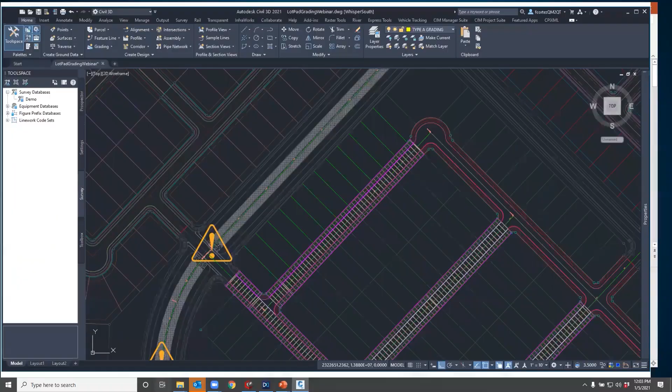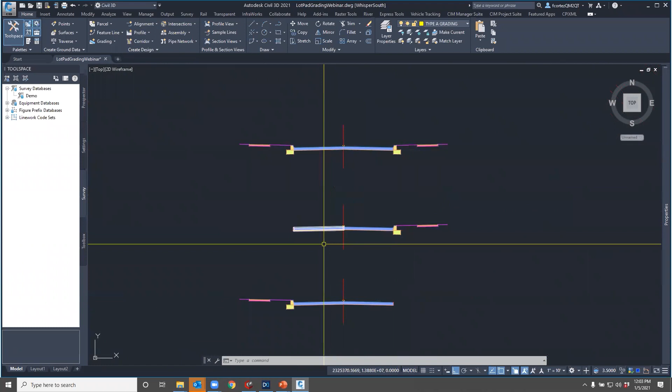So without further ado, let's go ahead and get into our demonstration. This should look pretty familiar to everybody. What I have here is just a basic corridor. This is a residential project. If we come over to the side, we have just a regular full street section, right curb, left curb for our intersections. And this is the area where we're going to be showing you how to use this new tool. What I want to do first of all is explain the different types of lot grading.

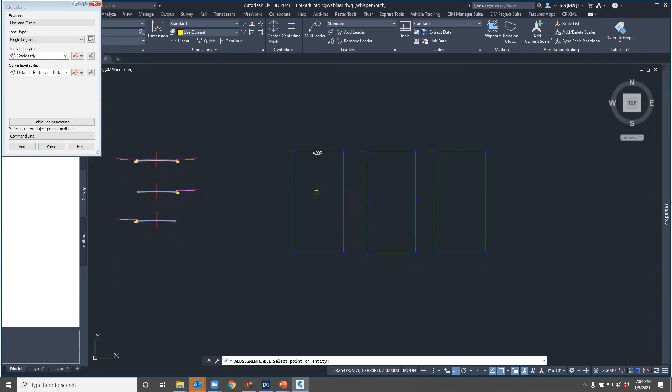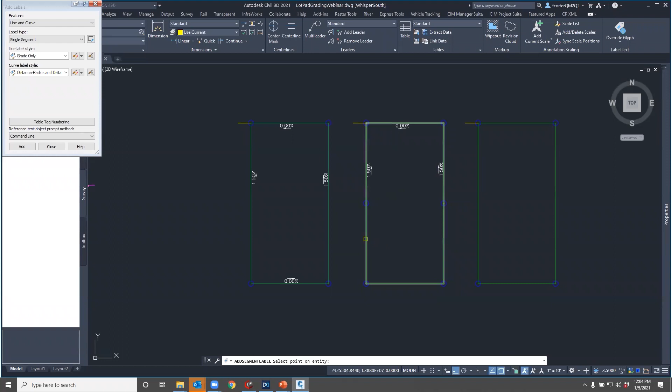I'm here in South Texas, where we have A, B, and C lot type grading. So what an A lot typically is we will have no grade horizontally. Longitudinally, we'll have on an A lot grading towards the front, like towards the street. What we have with our B lots is we'll still be flat across the front, but we'll have a split where the front half of the pad will grade towards the front and the back side of the pad will grade towards the back. Then what we'll typically have is a C-type lot, where as you probably guessed by now, it drains towards the back.

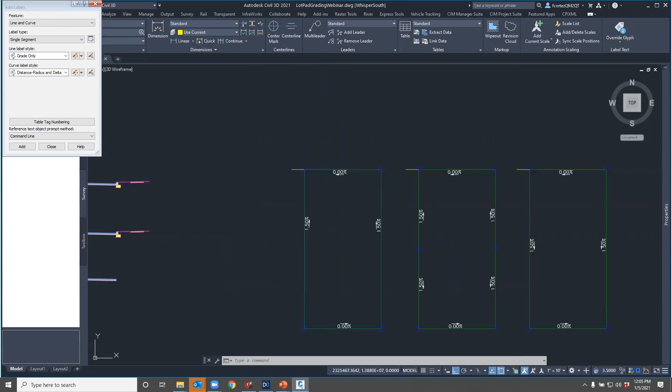So I know these are probably called different things in different parts of the country. Here in Texas, they're just called A, B, and C type lot grading. Now, what I want you to notice is that this is just a regular feature line right now. There's no grade, no elevations on it. I started off at 0, just went up at 1.5%. Started off at 0 here.

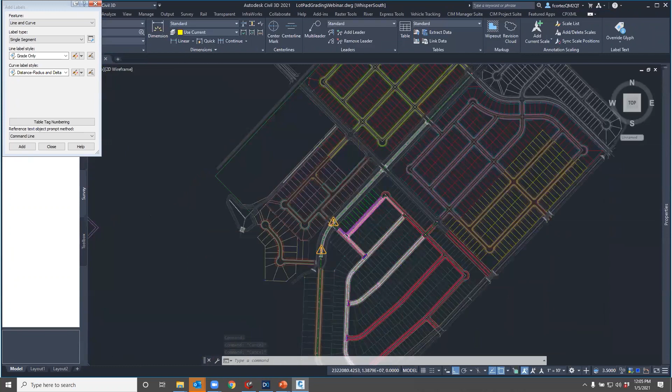So what we're going to end up doing, first, what we're going to show you is how to grade along these lot lines using our AutoGrader tool. Then on this side, what I'm going to show you is how we could do, let's say, a C lot here where we want to drain towards this drainage structure. And on this side, we probably want A lots because these two streets are pretty much the same elevation.

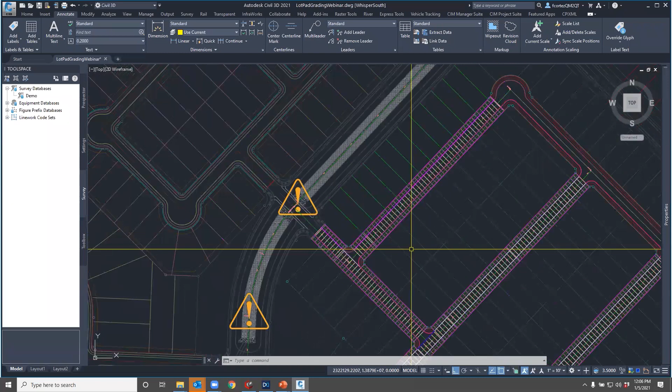So what I'm going to do is I'm going to go ahead and start by opening up my CIM Project Suite. I'm going to go ahead and open up the AutoGrader tool.

If you have this suite already, right off the bat you'll notice there's actually a couple of new buttons here. These should be rolling out with the new version, but now we have the ability to go ahead and create surfaces straight from this interface, and we can also create surface boundaries straight from our interface.

What I want to go ahead and show you is we're starting off with a blank canvas here, so nothing's been set up. So we're going to go ahead and walk through the different types of grading AutoGrader could do.

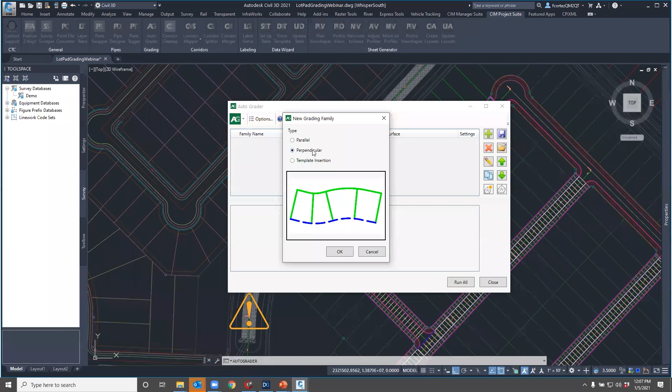Right now we're doing residential lot grading, so the parallel feature wouldn't be something we necessarily use a whole lot. The two we're going to be mainly focusing on are perpendicular grading, which is currently available if you have a CIM Project Suite, and the new feature called template insertion, which works a lot along the same lines as a perpendicular setup. But the difference is, as you can see in the preview, we can go ahead and add different items along our road alignment and throw it in perpendicular or horizontal.

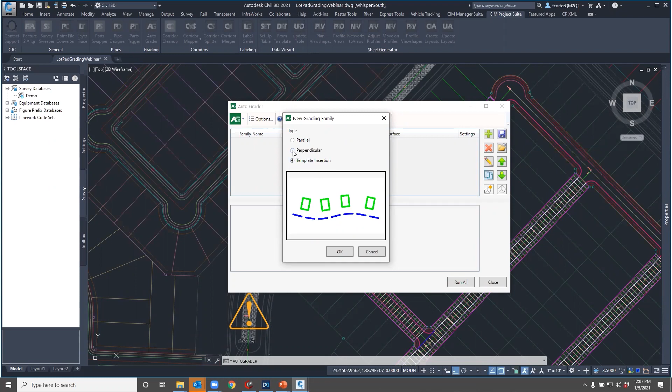So first, let's go ahead and walk through a perpendicular setup.

What I'm going to want to do first is take these existing feature lines I have out here. If I close this out, I have this row of existing feature lines. If I look at the properties and open this up a little bit more, you can see there's an elevation here at the right of way, which is pulled off of my corridor surface. But the back has no elevation, and that's going to be the same across all of these.

The main thing I want to point out right now is that there's only two PIs on this feature line. Typically when doing a C-type lot grading, we would want to go, let's say, the first 25 feet, which is usually like a building setback line, and we might want to add a PI there on all these. Then we might want to go the pad distance, which is usually 60 to 80 feet, and set another PI there. I'm going to go ahead and walk through how we can establish those on these existing feature lines using our AutoGrader tool.

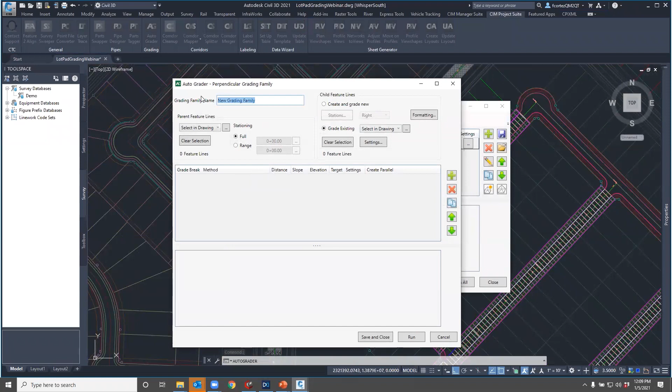Let me go ahead and relaunch the tool. And what we're going to call this is type C grading left.

So there's two ways we can pick feature lines. We can either select them from the drawing, or we can also do them by a filter, by a layer, description, by a name, style, or we can pull them in from sites.

In this case, what I want to do is just select it from the drawing. I'm going to go ahead and grab that feature line.

Now what I can do is there's two ways I can create child feature lines off of our main feature line. I can either create new ones or I can grade existing ones. So in this case, what we want to do is grade the existing ones, since we already have feature lines there.

So in this case, I'm going to do it by filter. I can type the layer name in here, or I can hit the green select box, which I'll do now. Go ahead and hit OK. Now it's only finding one feature line, so let me go ahead and hit the selection box again and grab the other ones. Now you can see it's found 13 feature lines.

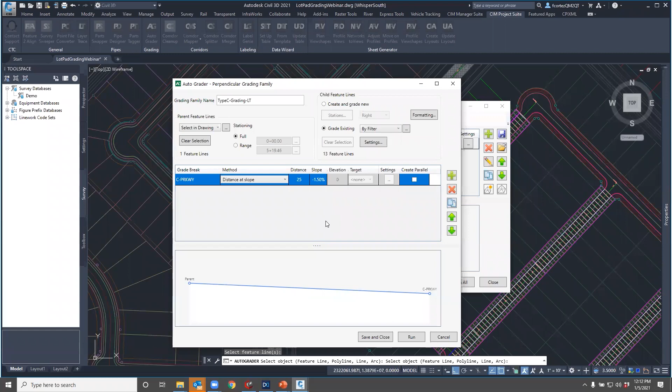And one of the things that I will touch on are, I believe these last two, maybe the last three, are new features. Right now, I'm just going to go ahead and do a distance and a slope for my parkway. Now, again, this could change from city to city, state to state, whatever agency you're working for. In my case, I'm going to go back 25 feet from my right of way. And since this is a C lot, I'm just going to stay conservative and do, let's say, 1.5%. So that's going to be my parkway to the front of my pad.

So let me go ahead and add another one where I'm going to do C pad, and this is going to be my pad depth. Again, I can do another distance and a slope. Let's say these pads are 65 feet deep, and we want them to be 1.5% towards the back. And lastly, let's go ahead and do a C pad to the rear. And this is where I want to use one of these new features. Let's go ahead and slope to the end. So what it's going to do, it's going to take whatever distance is remaining and apply a slope to it.

So where this might be helpful is, let's say there's a wall towards the back of these lots going down to this access road, and you maybe want to do a 5% max grading across your lot, and you want the difference to be a wall, you can go ahead and do this function. If you want to slope to an elevation, let's say there is a wall back there and you know what elevation that wall is supposed to be at, you can go ahead and slope to an elevation. Or if you just want to go down a certain relative elevation to your last elevation, you can also do that as well. So we'll just go ahead and do slope to end for now. Let's go ahead and keep with our theme and go 1.5%.

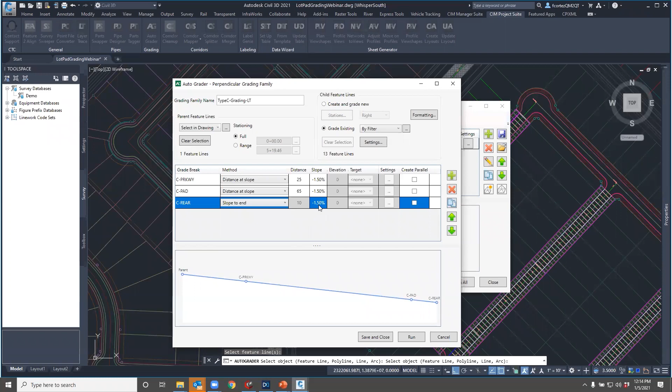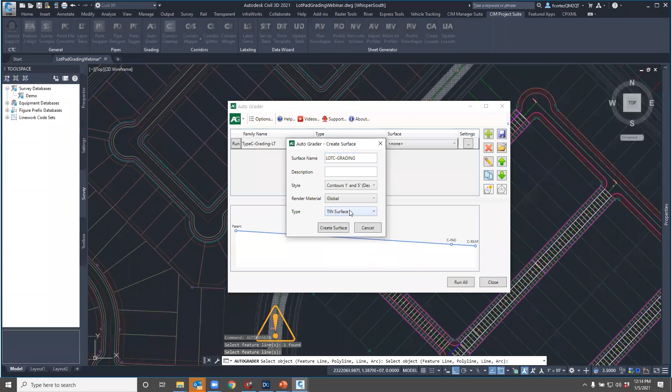Let me go ahead and save this. And again, another thing we can do: right now, we just have the finished ground surface of our corridor. Let me go ahead and create a new surface straight from our interface. And let's go ahead and call this one Lot C grading. Go ahead and throw this one on a 1 and 5. And let's tell it to create our surface. And now what we want to do is actually put this Lot C grading, the feature lines that it's about to edit here, on that surface. And actually, just to make sure that this is all correct, we will go ahead and save and close.

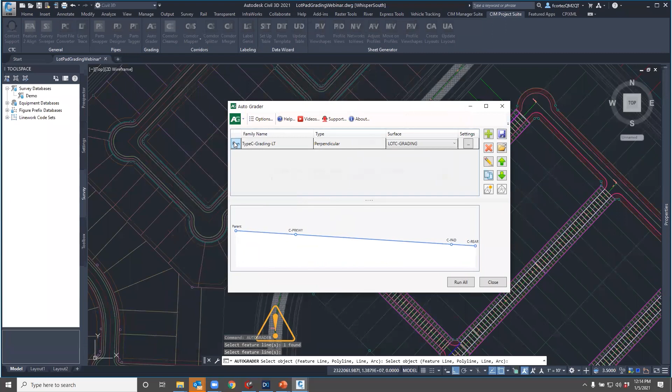And now let me move this off to the side so we can see it work. Just going to hit the run button. And let me go ahead and close this out. And now if I grab these feature lines, you can see there are our feature lines with the new PIs or spot elevations on them. So this tool in itself is very time saving as far as having to come in and do all this line work on your own.

And to take it a step further, let's say since it's creating these additional PI points, what if we wanted to connect them all? So let's go back into AutoGrader and see how we can do that. Go ahead and double click the family name and it brings up the settings. And here at the end, you can see that there's a create parallel checkbox. So let's say we want to connect all of our parkway and maybe all of our pads. I can just check the box on for both of those. Go ahead and save and close. And let's go ahead and rerun the tool.

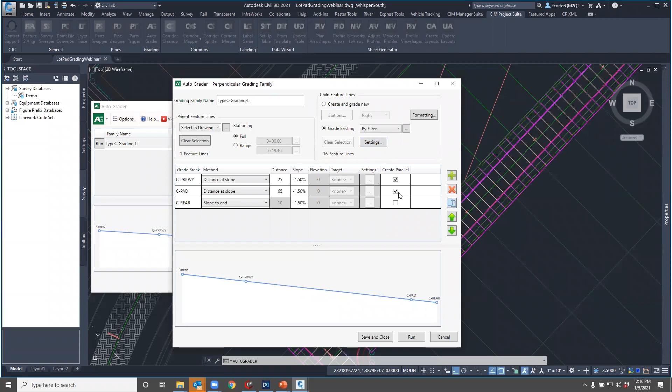And did I not? Let me try one. Okay. So for some reason, it's not working. Again, this is a beta tool. It hasn't been released, so there are going to be some quirky things like that. We'll obviously get that worked out before it gets into your hands.

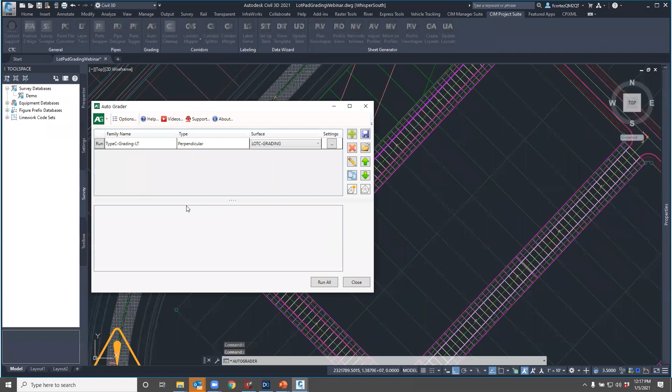So now let's take it a step further. So on this side, you can see that I've already extracted a feature line along my right of way. And let's say I don't want to have to create these feature lines every single time. So I can actually use AutoGrader to lay these all out for me. We go ahead and open up the AutoGrader tool and let's hit the green plus button again. Go ahead and do perpendicular grading. And this time, let's call this type A grading on the right.

So I'm going to go ahead and select this feature line. And this time, we're not going to be grading existing. We're actually going to be creating new line work. And so let me go ahead and click the stationing. And so I know that these lots are 42 feet wide. So I can type in 42 foot as my interval, click on my family and just hit plus. And you can see it's added in all the stationing along every 42 feet for me along there.

Now I can go to formatting and the style is fine, but let's go ahead and put this on a type A grading layer. That way, when we go to do our pad grading, we know what layer our feature lines are on. And let's go ahead and make sure that they are on our pad site.

One of the things I can also do from here is I can create a site or create a layer straight from this interface. But we already have that set up, so I'll go ahead and hit OK. And you can see that there's 11 feature lines that it has established based on our stationing.

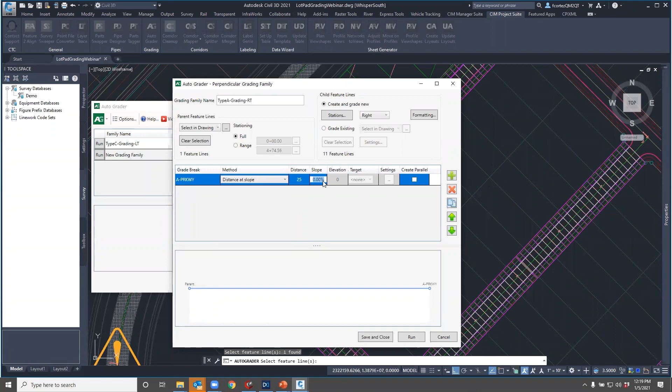Go ahead and hit the green plus button again. And this one's going to be a type A grading, and it's going to be my parkway. And I'm going to do a distance and a slope again, 25 feet, but this time I'm going to go up 1.5%. Let me go ahead and hit the plus button again. And now we're going to do the A pad. And we're going to go 65 feet for that at 1.5%.

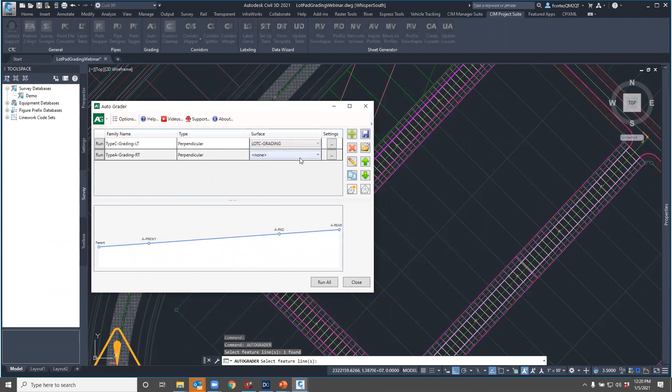And lastly, our rear lot. So a lot rear. And this one, we are going to go ahead and do 30 feet at 1.5%. And I'm going to go ahead and click the create parallel, and let me go ahead and hit save and close. And let's go ahead and create a new surface for these, just because we're dealing with the new block. So this is going to be our A grading. And let's go ahead and put this on a 1 in 5 layer, create the surface, and now we can go ahead and put this on its own.

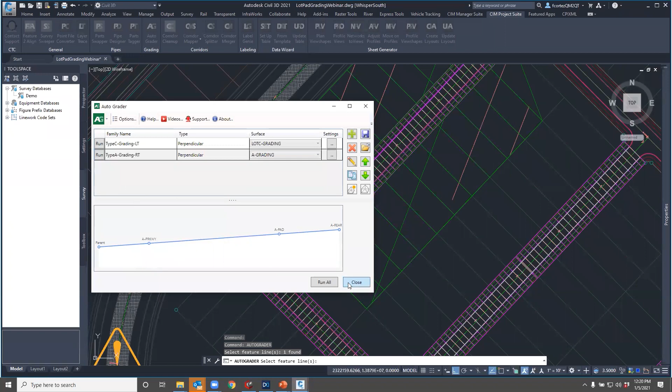So I'm going to go ahead and hit run, and you can see that it's going to create not only my lot lines, and actually it looks like this time it did work, where it created my feature line. So it connected all of these lines for me in a parallel line. So now all this is part of our surface. So now we get to the fun stuff. So we can lay out all of our lots.

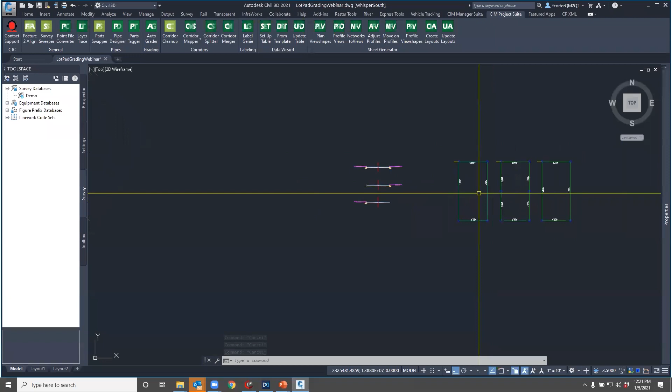Now let's see how we can go ahead and add a template in to go ahead and put this information in. Now first we want to make sure we are selecting our feature line and it's on our type A grading. We go ahead and open up the auto grader tool again, and we're going to do the green plus again. And let's start with the A lot side. We're going to use our template insertion. We're going to go ahead and hit OK. And these are going to be our type A pads.

And so just like before, we can go ahead and select the feature line from our drawing that we want to run these pads along. And now there are a couple of settings. I can either check the box on to do this at every feature line intersection. I can have it do it at midpoints between the two feature lines, which means it would center your block or your feature line that you're going to use as your template. Then we can also filter, just like before, layer, description, any of that information.

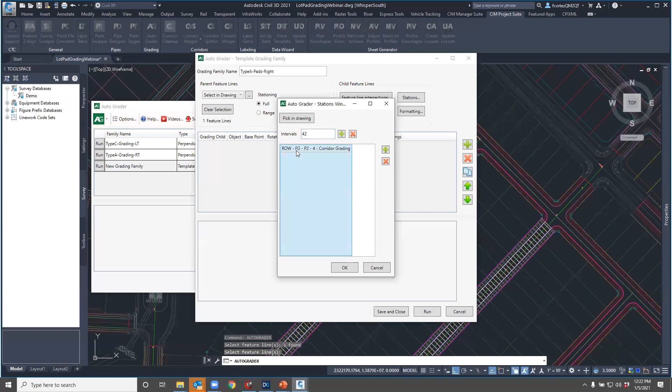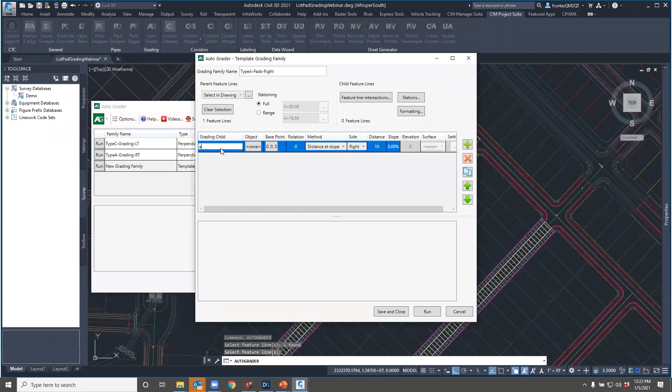What I'm going to actually do is I'm going to go ahead and do my stations again. I want these stationed out every 42 feet. And I'm going to go ahead and hit the green plus after selecting my family. And go ahead and hit OK. And now we got to tell it what to do. So when I hit the green plus button, you can see the interface looks the same. So we can do this type A pad run.

So the thing is now I can actually select an object to put here. So let's go ahead and hit our type A grading feature line here. And we can also give it a base point. So I happen to draw this in. I know that this is 5 feet off of my property line. And we can also set a rotation. This will be something that you will have to play with, just off the get-go. If you do a 0, it might not put it in the right spot. Obviously, I've already checked this on my stuff, so I know.

And then now it's asking us, what method do we want to do? So we know that these pads typically match the grading. So we're going to go ahead and do a distance and a slope again. We are doing the right side. And let's do the same 25 feet. And let's go up at 1.5%.

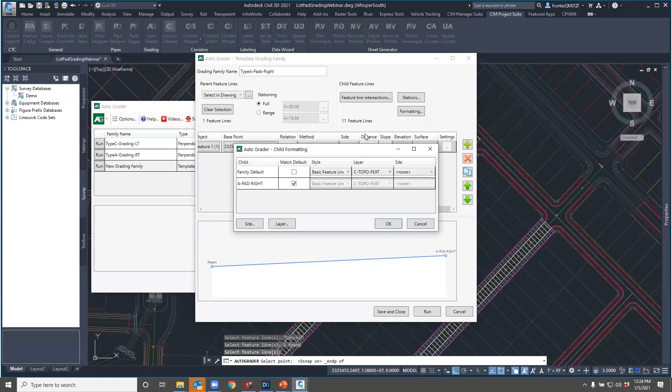Now I could go to my formatting here, and let's go ahead and make sure that the layer that it's putting these on is also the type A. And let's go ahead and put it on a pad site. And we'll go ahead and call this OK. And we'll go ahead and save and close this.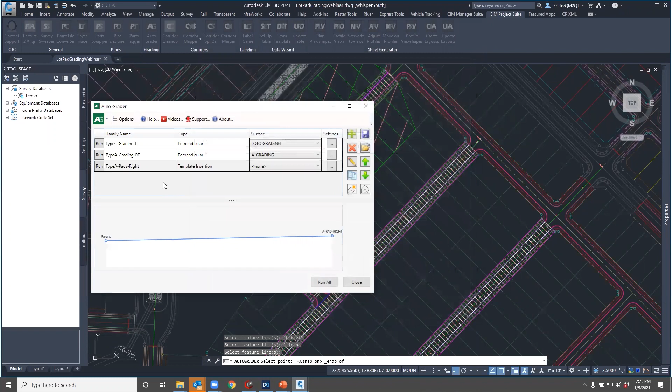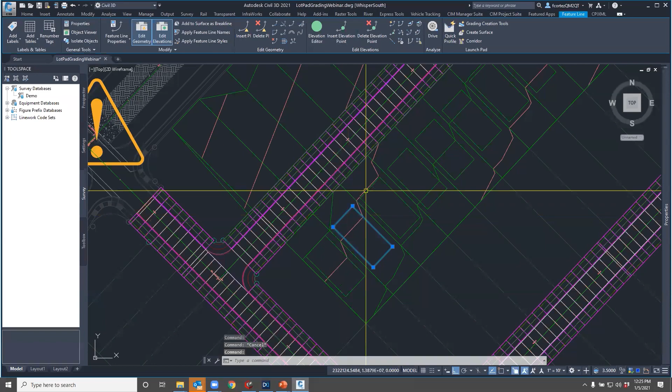Now we can tell this, go ahead and put these feature lines that it's going to create and copy for us on that A grading. And so now when I run this tool, we'll see the surface change over here. So just like that, I'm able to get my pads in. I mean, I just did 11 of these in a split second,

where the current workflow for a lot of this stuff is going to be, I know in the past I've had to draw additional feature lines off of here. And then, as stuff changes, I would have to use this feature line, update, maybe this end to my new right of way elevation, or use feature line hierarchy to get this elevation to change and make sure that this was at the right slope. And then I'd have to change all these slopes on my pad,

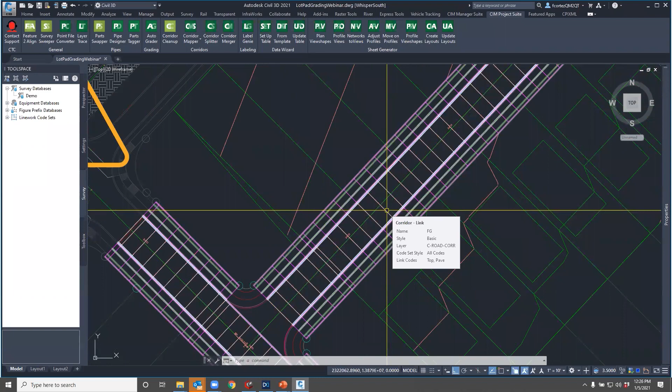where you can see now it's all pretty much dynamic. If my elevation on my main feature line was to change, which would be triggered by my corridor changing, then all I have to do is hit auto grader and just hit run, and all these elevations would change that quickly.

And so what I was saying before is, so let's say here towards the end, maybe we want to grade this one towards the back for whatever reason. All I have to do is come in here and let's go ahead and change this feature line to type B grading. And let's make this feature line type C grading. Because like I said, here in Texas, we can't just go A to C. We would have to go A, B, and then C.

And so what we also want to do is we're going to go ahead and show you how the grading on these will change, which means the surface will change. And then we'll come in here and we'll tell it to go ahead and use these last two and switch them out for different grading. So let me go ahead and launch my auto grader tool.

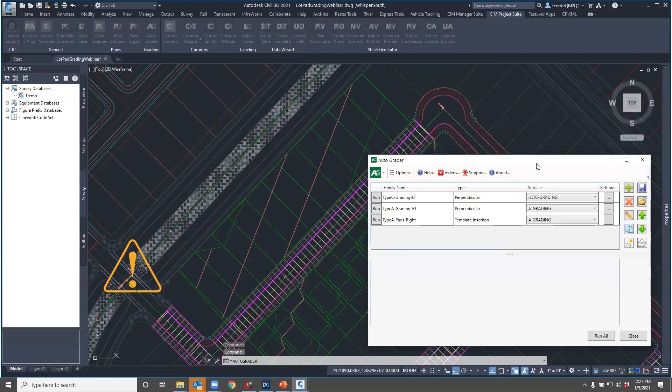And first thing we want to do is, if we open up our A grading, you see that we had 13 feature lines in here before. So this one is type C, and this one is type B. So these other ones should be the same. This should be fine. So let me go ahead and rerun this. So I'm gonna go ahead and hit save and close. Go ahead and run that again.

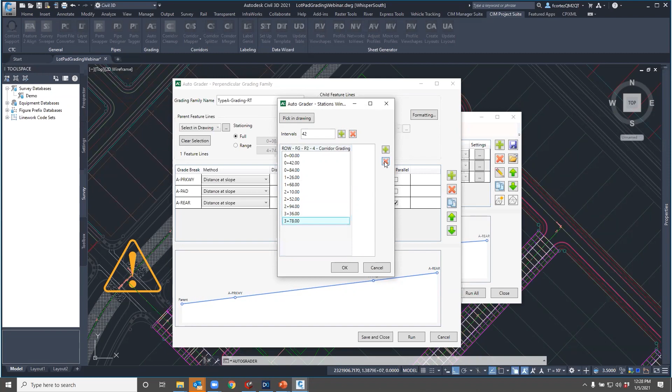And now this should be type B. I know what I did. So we need to go ahead and take those last few stations off by hitting the red X. And so this is where, because I did it by stationing, it didn't update. So I'm gonna go ahead and save and close it. Go ahead and run it again. And these last two, yeah, are not there, which is what we want.

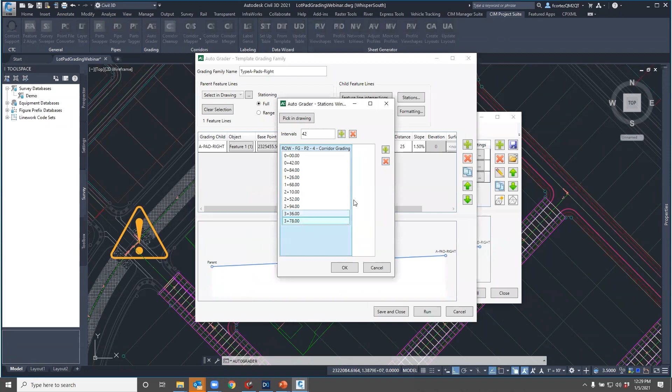So now let's go ahead and add the B lot grading in here. Well, actually, what we can also do is, if I was to go ahead and rerun our pads, because this is looking for those same stations. So let's go ahead and knock off these last two, save and close it, and let's go ahead and rerun it. Now we're missing those last two stations.

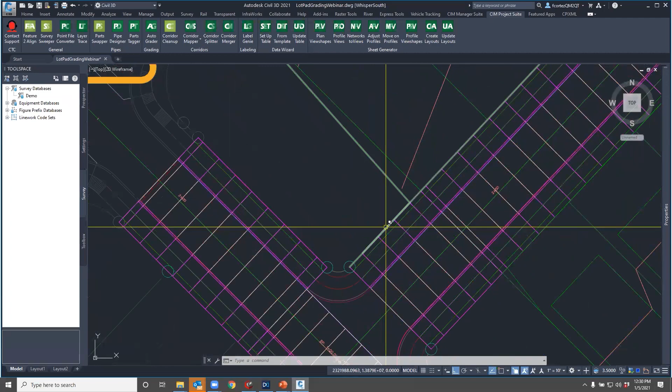One of the things I do want to point out also, so we could, you know, use AutoGrader ideally to even lay these lots out if you wanted to. If these lots were not laid out correctly for whatever reason, I mean, you could use the tool to go ahead and lay those out as well. Almost like a site planning tool.

So now what we're going to do is let's go ahead and go into our auto grader and the type A pads. I'm just going to go ahead and do a copy of it. And when we open it up, let's go ahead and change the name of it to the type B pad lots. And then let's go ahead and get rid of all these stations. And then let's go ahead and get rid of all of these.

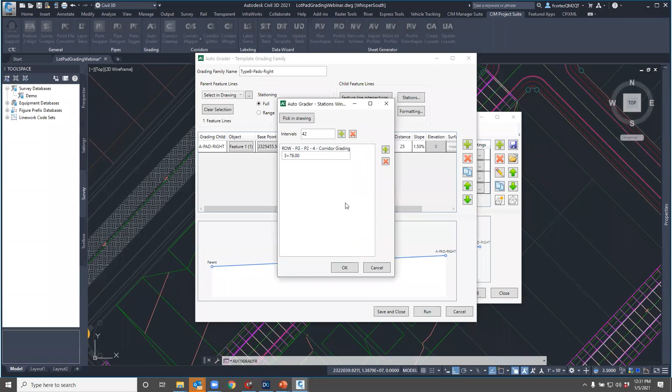So really it's a 378 we want to keep. So we have our A pad right. But now let's go ahead and change the object to our B pad lot. And let's go ahead and set that base point to this endpoint. And now we're still going to go up at 1.5% for 25 feet for our parkway. So that's going to stay the same. And we're still using the same feature line. We're just going to do a type B pad right.

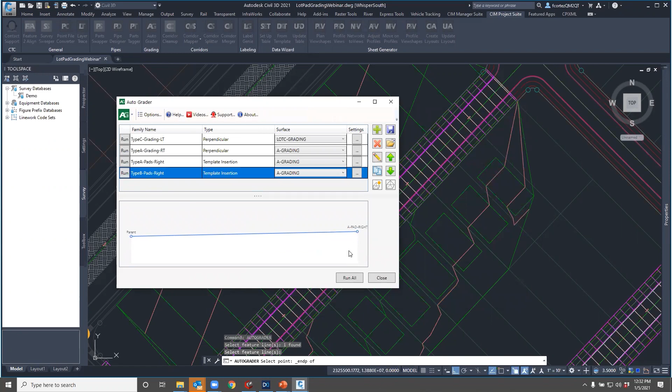So we're still going to add it to the same surface. And let me go ahead and run this guy. And there's our B pad. See how now there's a split right here? If I go ahead and close this, there's my B pad. So now let's go ahead and do the same thing for our C pad. Like this.

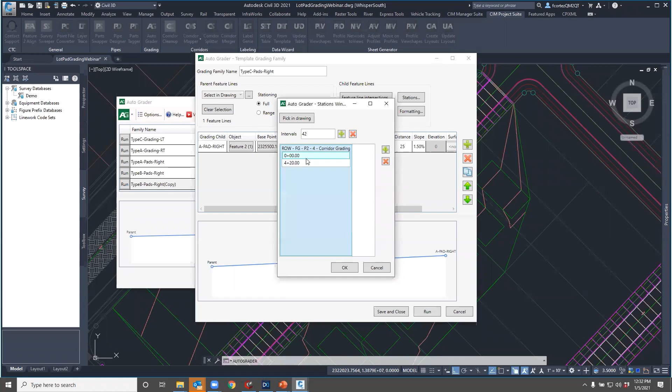And this time our stations are going to be 420. So one of the things I can also do is just manually type in a station. So we can get rid of that zero. And now we also want to change this from a B to a C. And we're going to change the base point on where we're inserting this to right here, the corner of our lot.

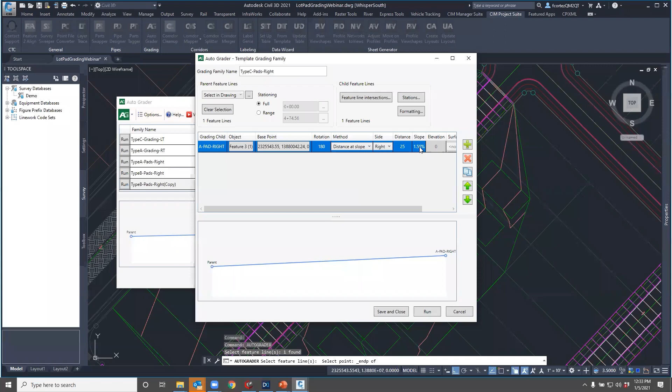But this time we're going to go down at 1.5%. And let's go ahead and change this to C pad. So we have our one feature line. Let's go ahead and save and close this. And let's run this guy. There we go. There's our type C lot. And just in case you guys want to see, let's go ahead and label these feature lines. Label these as well.

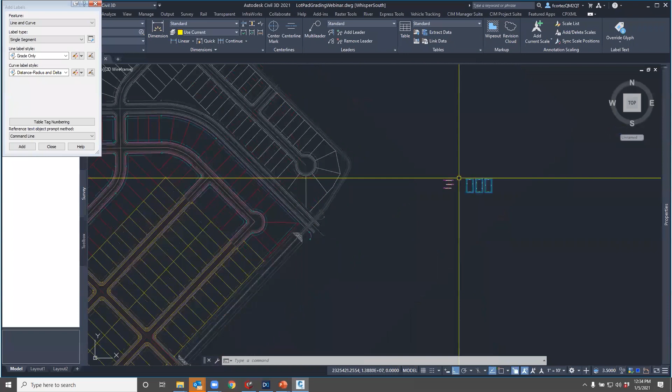And so now the kicker. So what I actually did is I deliberately left these a little short. So I have my 5 feet building setback here on this side, but I have a little over 5 feet on this side. So current workflow would be, oh man, I copied the wrong feature line. Now I got to go through and move all these guys. Well, since we used AutoGrader to create them and it's pulling from this template, all we have to do is move this guy out 2 feet.

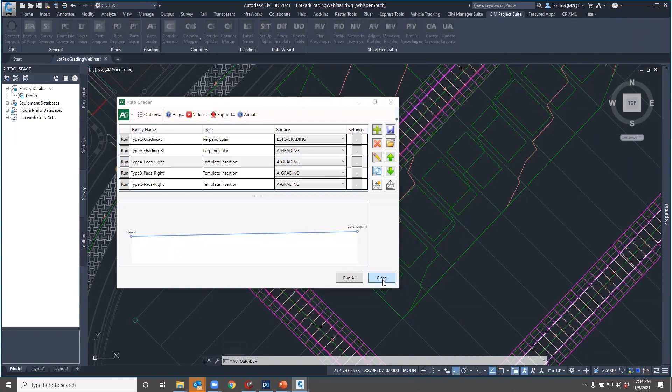When we come back to here, I just have to go ahead and open my AutoGrader tool. And let's just go ahead and run our template again. And just like that, the whole row is now updated. So we have our 5 feet spacing. So again, like I was saying at the beginning, this workflow will save so much time on doing these often tedious lot grading.

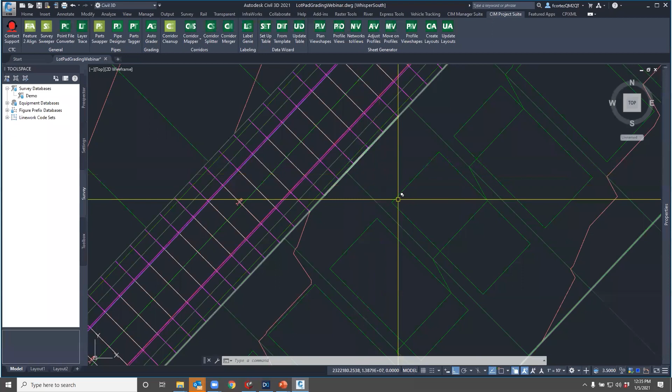You know, it's a lot of copying feature lines, having to add construction lines in to make sure everything is correct. And actually, one of the things I can do just to show you how these are relative is we'll go ahead and do a feature line from there and go perpendicular, and let's pull it from our finished ground surface. And now if I label this guy, oh, I must have grabbed the wrong spot, but that should be our 1.5%. And it'll actually be different on each side. So it depends what side you click to insert it.

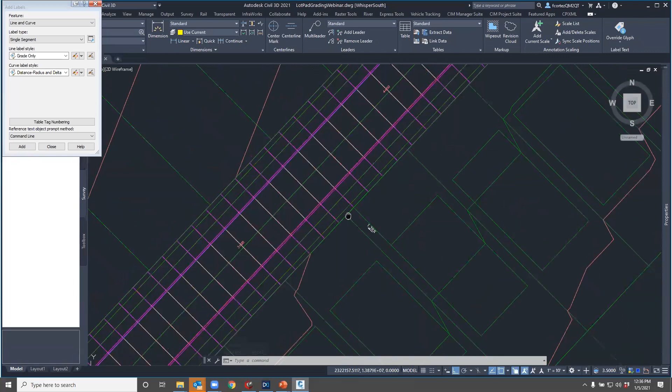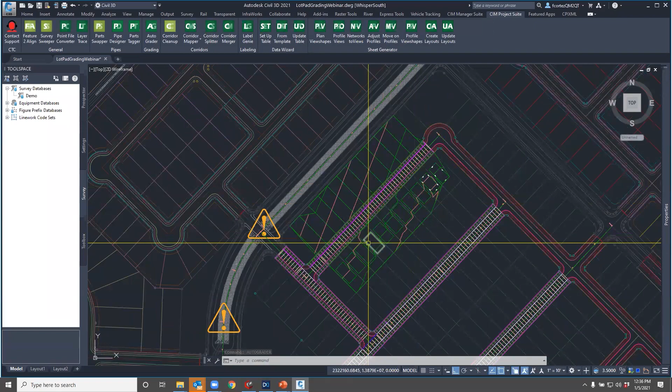But the existing workflow to get to this point, even, I've been able to do this in about 20 minutes. And that's with showing you how to do every step. When in reality, once I save this drawing, I have all these templates saved. So what I can actually do is I can go ahead and save these out as JSON files to be used later in other drawings by simply importing them. I'm not having to recreate the wheel every single time. And so, like, let's say there is a one-off situation.

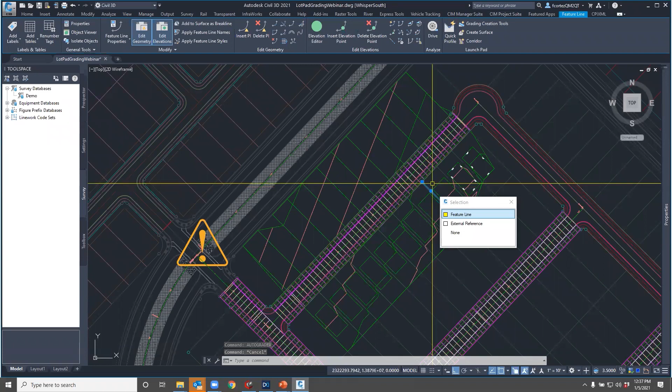One of the things I really like about the CTC tools is it doesn't create any proprietary features in your drawing. I can actually send this to another designer, and they aren't going to know how I created all this stuff. They aren't going to know how easy that was for me to create. They will still be able to come in here and edit it just like a regular feature line. Using your quick edit tools, they can insert elevations.

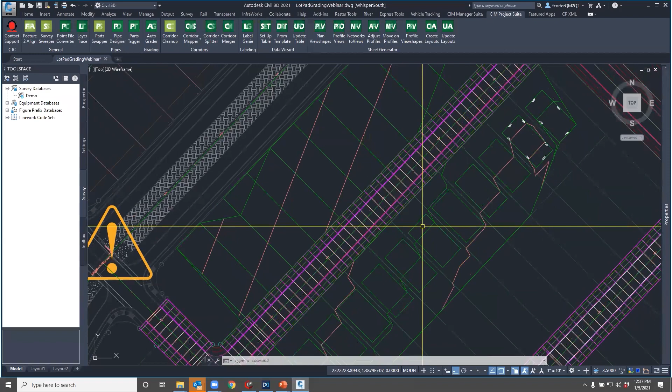So it's a very lightweight, very robust tool where I know that all of my information is correct because I'm setting it up. And it's creating these feature lines for me at the correct elevations based on just a template that I set up. And it's very easy to update. I've been demoing these tools for quite a bit, and I'm always impressed by how streamlined the CTC suite in general makes the workflows for senior designers and even designers.

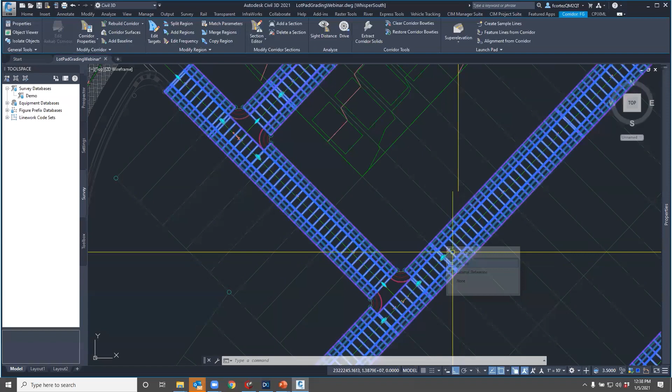So, in a nutshell, what I wanted to also show you. So, one of the new features that is coming out as well. So, let me go ahead and grab this corridor real quick. I know we're running low on time. I'm going to go ahead and extract my P2 feature line, which is this guy.

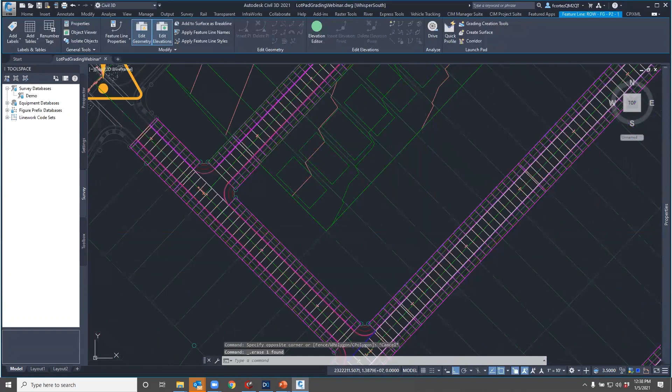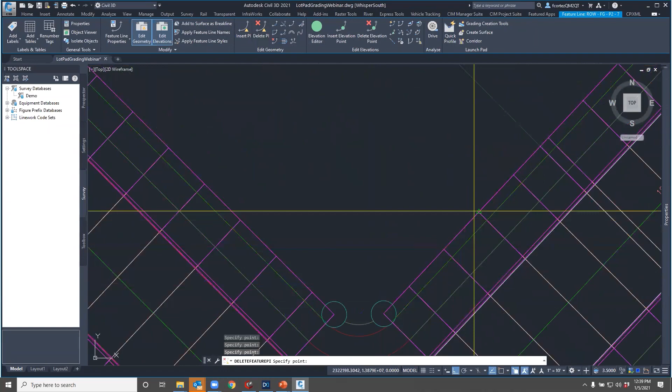Actually, what I want to do is grab it, and I want to be able to make changes to it. Let me go ahead and extract it. One of the things I can also do, because these are just regular Civil 3D objects, is I can make any changes I need to any one of these lots that's one off.

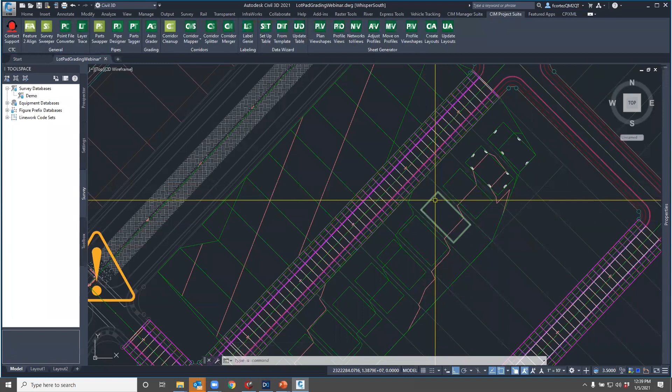So let's say you run earthwork and maybe some of these lots need to come up or down. The foundation is here. So now if I just need to make changes to these, let's say 3 lots, I can come in here with regular Civil 3D commands and make changes and update this lot in particular, or these 3 lots in particular, whatever the case is. And it's not going to hurt AutoGrader. It's not going to offend it in any way.

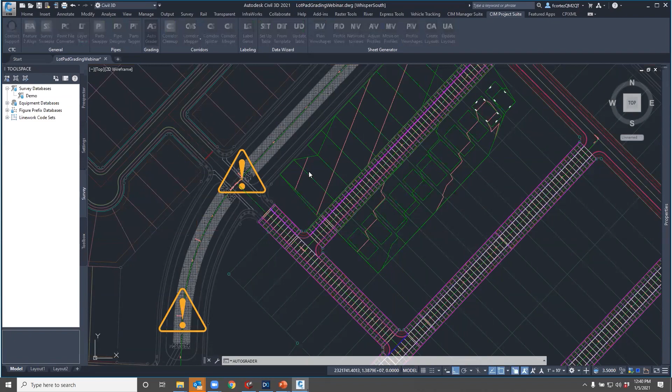Now, if somebody wants to come in and completely mess this up, I also have a backup. I can just run AutoGrader again and recreate all this line work and then make changes. So again, a very robust tool. If I wanted to run earthwork on this and realize, hey, I'm too far in the cut, so I need to make this grade steeper to get some fill in here, really, it's just a matter of coming in here, changing these grades, and rerunning the tool and your surface updates.

One of the new tools that I wanted to show you, let me go ahead and run. We need to make a type A left. So let's go ahead and do that real quick. I'll do perpendicular. So this will be our type A grading left. And I'm going to go ahead and select that feature line I just extracted from the corridor. And I'm going to go ahead and create new ones. And let's do that 42 feet again. And so go ahead and throw those in.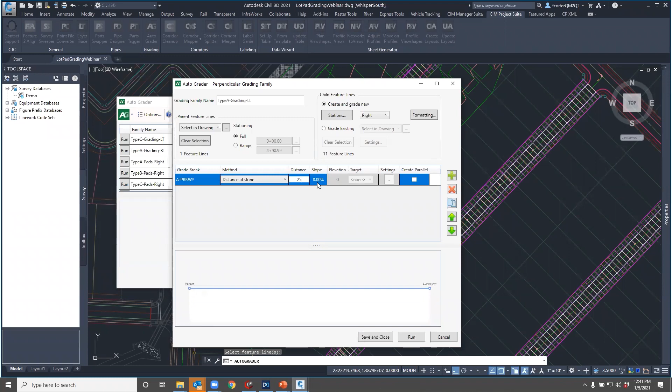And so what I want to show, in this scenario, since these lots might be higher than these lots, in a real world scenario, I don't know what this grade is supposed to be here at the rear of the lot. So let's do a grade parkway. We'll do a distance and a slope. So we're going to do our 25 feet, 1.5. And let's go ahead and put our pad in. That was 65 feet at 1.5. But I don't know what that last rear lot is supposed to be.

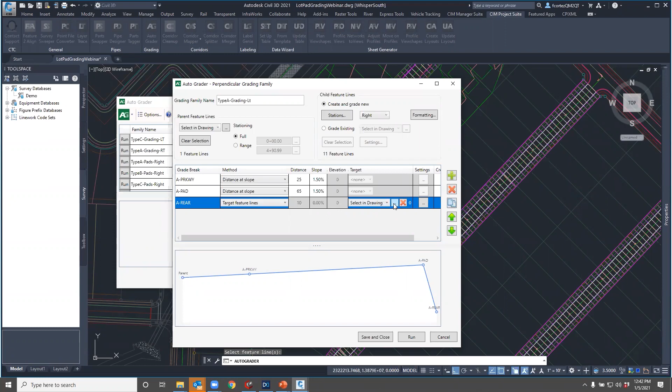So one of the things that we can actually do is target a feature line. Now, if you remember when we did the other grading, we had it create this parallel feature line for us. So what I can do is tell it to target that feature line for that slope at the end. I'm going to select it from the drawing, grab that feature line. And so there's going to be some variation, right? So let's say, I think this street was draining down from northeast to southwest. Same with this one. But here in between, these elevations might be different.

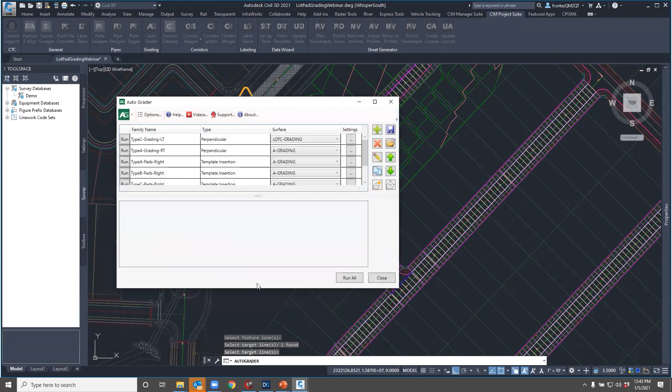So this grade here in the back is going to vary, which for us, a lot of the times as senior designers, we don't know what this grade is going to be every single time. So here's a way for us to set that target feature line. So it's going to just target it for me, whatever that distance and whatever the elevation is. And so let me go ahead and save and close this guy. And here's showing us a preview of what we're going to do. Let's go ahead and run it.

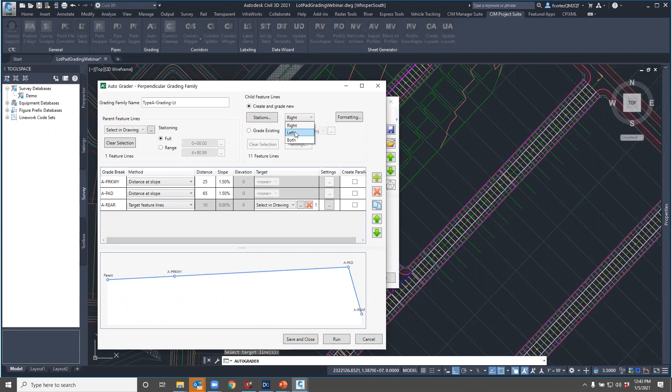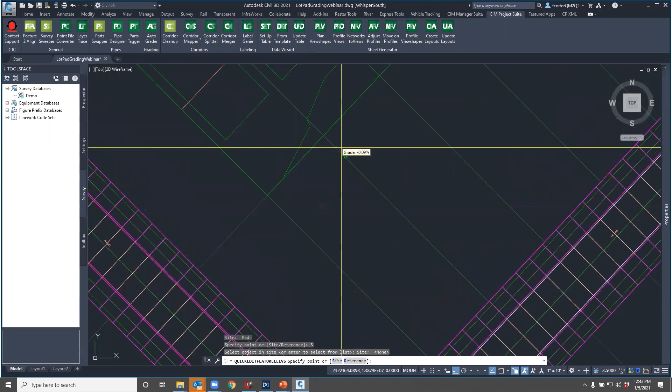Oop. Oh, here we go. No, I missed it. We need that to go on the left. So as you can see, I just made a mistake. I can just rerun the tool. And now my mistake is fixed. And so now if we look at this feature line and I go to my quick editor, select this site, you can see it's 0.24%, 0.09%, 0.06%.

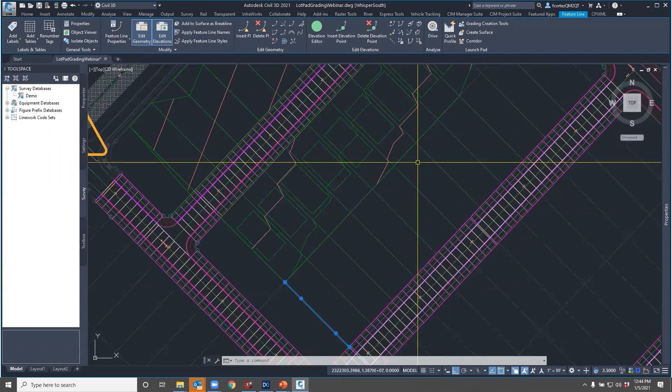So this new feature in itself is definitely, in my opinion, a game changer, because not only can I put the lots and the pads in, but my lot grading, I can have variable elevation and distances on the backside of my lots and have the CTC AutoGrader fill those gaps in for me.